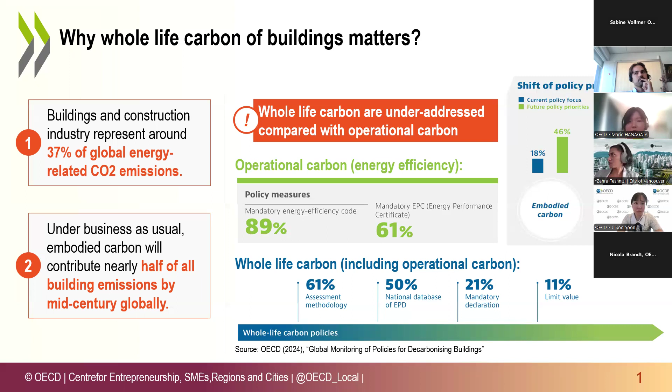Against this backdrop, we launched the OECD report on whole life carbon of buildings in February this year. This report is supported by a survey that we conducted across 11 countries and 7 cities, as listed here. While the level of progress varies, all of these countries and cities are leading in addressing a whole life cycle approach.

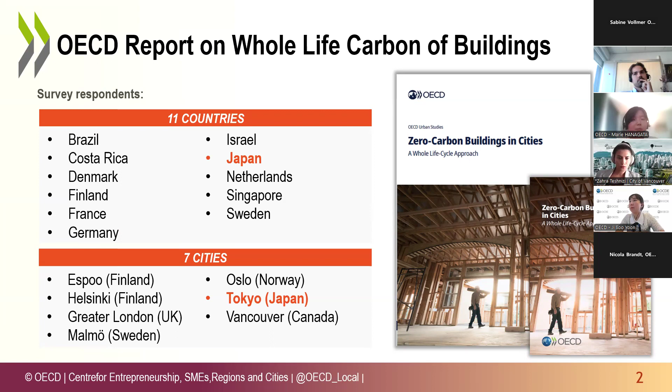Addressing all of these challenges requires time to collect data and conduct preliminary study, highlighting the need for a step-by-step approach and preparation before the actual implementation of regulatory measures.

This kind of step-by-step approach also appears in how they implement regulatory measures, but in different ways depending on the country or city. For example, in Sweden, the process began with mandatory reporting of upfront carbon only, but it applied to all building types. On the other hand, France took a different path by introducing limit values for whole life cycle right from the beginning, but only applies to some building types such as residential, office, and school buildings.

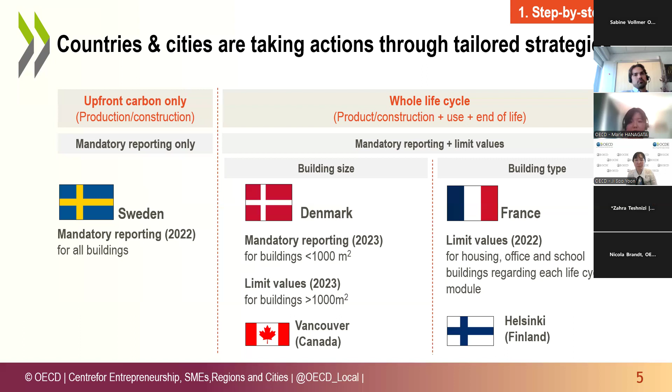Reducing workload can be tackled by developing digital whole life carbon assessment tools that integrate with building information models, BIM models. And the lack of EPD data can be addressed through policies such as incentives or regulatory measures.

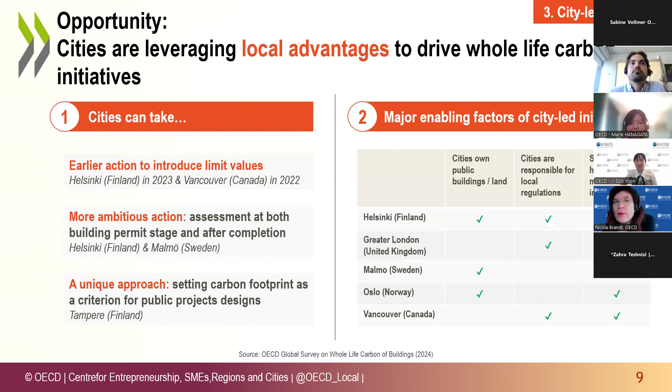That is environmental product declaration, which is basically a sort of certification that a manufacturer can obtain for their product that shows all the environmental impact data, including GHG emissions and so on. Because it's not easy to calculate embodied emissions, right? Yes, exactly, it's difficult to have the data.

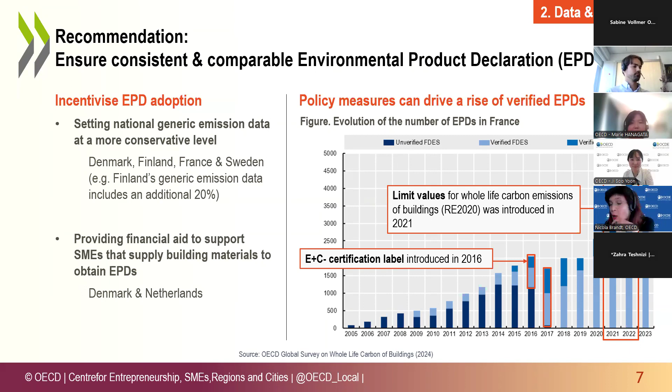And now, as Marie already announced or hinted, we have Hanna Wesslin, who's the climate director of the city of Helsinki. And we already heard that Helsinki has a lot of experience with this whole of life cycle approach. So we are curious to hear what you have to tell us, Hanna, over to you.

Thank you, Nicola, and thank you, Marie, also for the introduction. I'm happy to provide you a more in-depth story of the whole life carbon development in Helsinki, and maybe some nuances that might not be so obvious. So on to the next slide.

This is indeed the timeline that Marie already shared, but I wanted to let you know that the preparation did take quite a while. The discussion started already back in 2017 by developing the database on the national level. The city, however, was really eager to move on and acknowledged that probably the national level legislation will come at a point, but since we have so much in our power as a kind of monopoly in planning in the city, this was a golden opportunity for us to act.

But to set the limit value was indeed one of the challenges. What we did is go through over 60 buildings that the city had built, and did the calculations for those to be able to understand what the average is and where to set the standard.

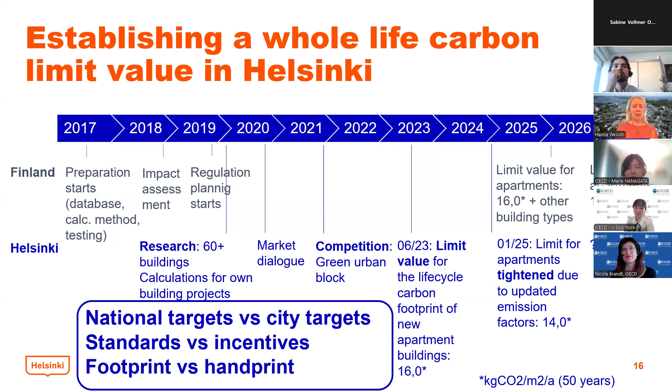This is really the kind of dilemma, or maybe not a dilemma, but an interesting discussion. We have a national value and a city value. All the bigger cities in Finland see that the national level target is extremely relaxed and doesn't really incentivize anything. Maybe it's for the learning process in the beginning, but since we have already practiced and learned for two years, the national level does seem unambitious.

What we have also understood with this experience so far is that the limit value does set a minimum. But we keep hearing from the sector that they could do much more. Companies are actually having their own limit values that are lower than the city value, and they would like to be rewarded for their good work. At the moment we only have the limit and it doesn't give you any incentives. So that's one question.

Thirdly, with the development of construction materials and technologies, and the need to make sure that we actually take carbon out of the atmosphere, we also now think a lot about handprint, because this is really about footprint. But what about any carbon that is stored in the buildings, like carbon negative concrete, that we have already experimented with? The limit value at the moment doesn't really take that into account, and we have to find other ways to incentivize that too.

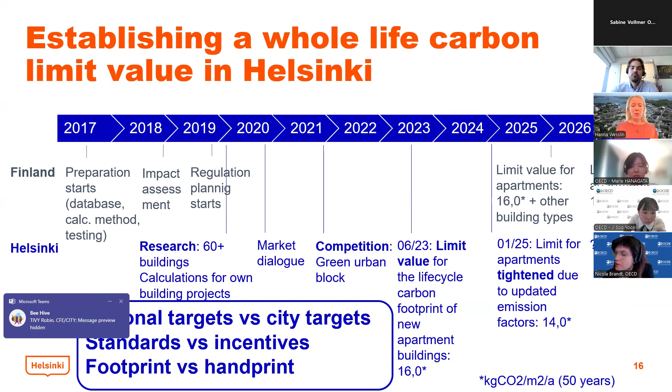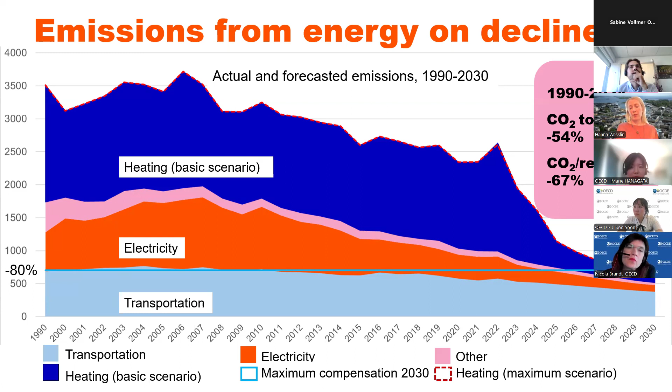But exactly as Marie was saying, when we look at the building sector, the material sector will be so much more important in the future than energy use. It's really imperative that we start using more low carbon products - reuse of components, reuse of materials, recycled products, carbon negative products, low carbon products.

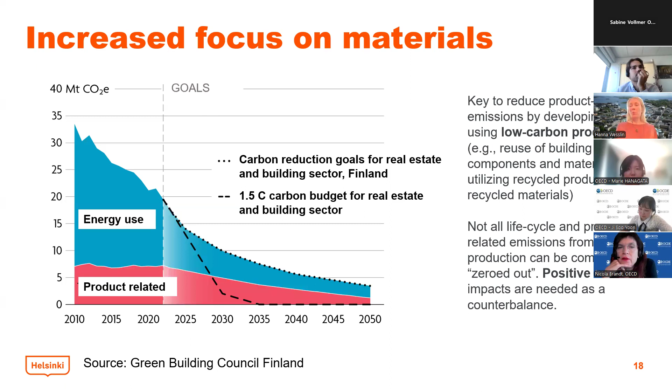The Green Building Council of Finland, which produced this analysis, also found that the current national level, the 2026 national limit value, reduces the sector's emissions by only 0.5%. So it is a reduction, but it's a very small number, and we feel that as a city we want to be more ambitious than that. And that's it for me.

Thank you very much, Hanna. I have a hundred questions, but in particular how you did that with the district heating. But of course, we're looking at the full life cycle.

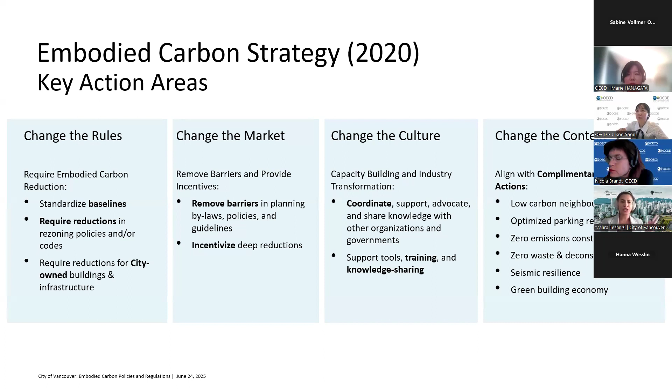Looking at the regulatory part - as Marie mentioned, back in 2020 when the Climate Emergency Action Plan was released, one of the biggest gaps we had was having a framework to standardize embodied carbon reporting. There are lots of standards out there, like the EN standard, the ISO standard, and one released around 2022 in Canada. However, the challenge was that the scope was still quite flexible to the judgment of the person doing the assessment. So our team worked with industry, with a lot of feedback from leading industry members from across North America and even globally, to develop embodied carbon guidelines for the City of Vancouver.

One of the huge leaps we were successful in implementing, which shows how cities and national governments can work together, is that our national government went ahead and adopted this series of guidelines we published as the Canadian National Whole Building Life Cycle Assessment Practitioner's Guide. Vancouver then went ahead just this year and updated our reference in code to this national guide, with an addendum for the City of Vancouver allowing some specific things not included in the national one, to allow for broader adoption but also some innovation.

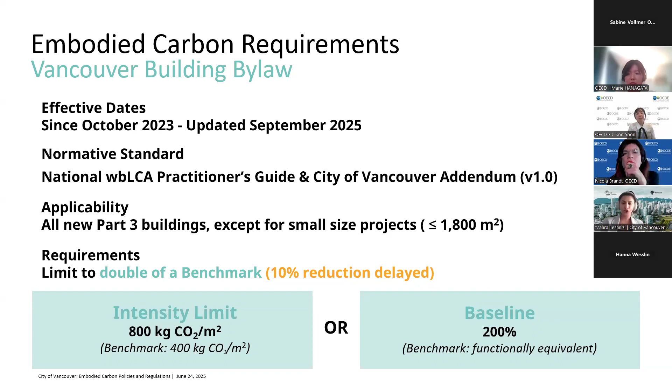And we started with a preliminary limit, which is double a benchmark. What was huge in what we achieved through those guidelines was that we developed a very specific way to define a baseline, given that we didn't have rigorous absolute embodied carbon intensity targets. The guidelines essentially allow 2 pathways: one is an intensity pathway, which we've set at a value of 400, using submissions received from rezoning from 2017 to 2024, and then a baseline path, which is a functionally equivalent baseline building.

So basically, as I mentioned, we provided 2 pathways and picked one absolute benchmark number, which is 400. We took it from the rezoning submissions we received, and essentially any reduction comes from that.

So what we had proposed was from 2025 to require our first reduction of 10% from the benchmark, which is delayed. We haven't taken this to council, even though it's approved in principle by council back in 2022. We haven't taken it to council for final implementation, and that comes with a lot of challenges industry is facing, and I don't think that's limited to Vancouver. We can get into that later.

The reason we picked that 10% and also that 400 benchmark is that if you look at our low-rise wood buildings on the left, you'll see that the majority of projects submitted today are meeting that absolute limit, so they don't really need to do much other than assessing and reporting. But if you look at the high-rise concrete, the third from the left, the majority are above that absolute limit.

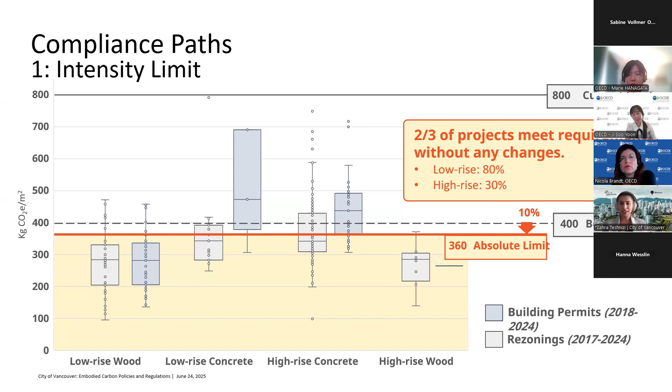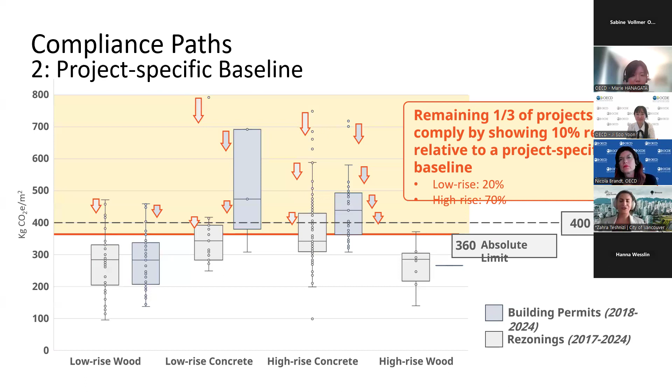We understand that these are more sophisticated projects, and we expect those to actually go through the baseline path, showing relative reduction from the proposed design rather than that absolute number. So what we understood is that this 10% initial reduction is not as challenging. Despite that, we are still delaying it for a proper time to go ahead with it.

So let's talk a little bit about enabling by removing barriers and providing incentives. First, we understand that our neighborhood planning plays a key role in allowing low embodied carbon buildings. Through our neighborhood and village plannings within the city, one example is the Broadway plan, which allows mid-density, say 4 to 12 story buildings, which now through our code is allowed to be built with mass timber, up to 6-story wood frame, which also allows for wood frame buildings.

So that is essentially allowing lower carbon structure. And then also we are allowing for simpler forms, and we've removed the minimum parkade requirements. The Broadway plan did it before the city did it citywide. So again, all of these enable reduction.

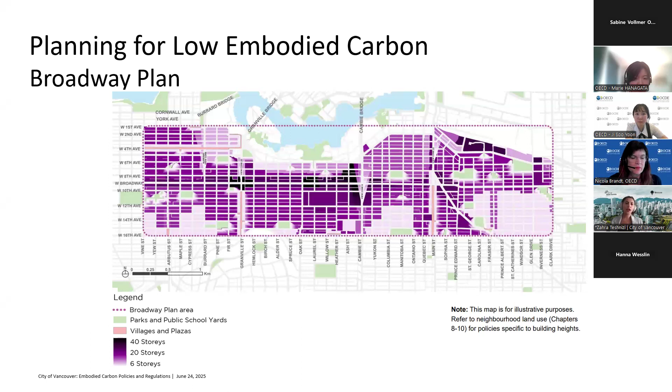We also have provided incentives for mass timber buildings specifically. Our code was updated just a couple of years ago to allow building mass timber up to 18 stories, encapsulated mass timber. And we also provided additional incentives at rezoning, so projects that go through rezoning to change their building zone are able to request an additional 2 to 3 stories depending on their height.

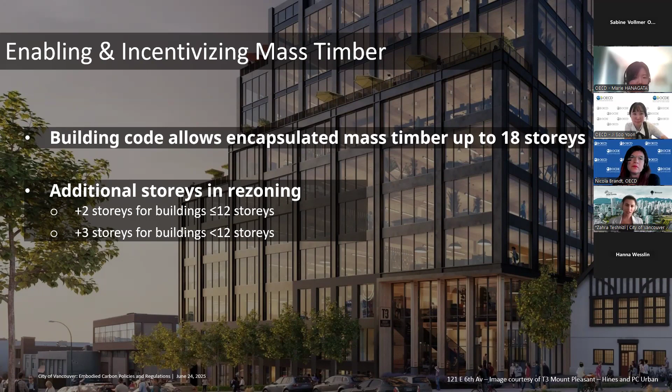We also provided incentives specifically for low-rise homes through a program we previously initiated for operational carbon, but which was expanded with a new stream for embodied carbon, providing financial incentive for 30% plus reduction in exchange for data. We've actually collected very valuable data from about 25 projects in this program, which will help inform our low-rise code approach later on.

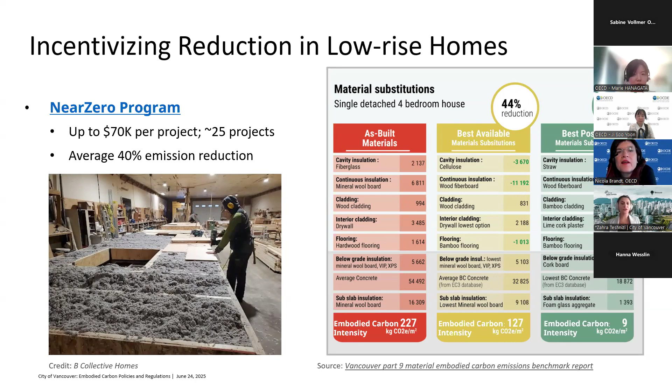So I mentioned that we have an addendum to our national guide, which allows us to encourage and pilot some more innovative approaches. One we're quite proud of, though we haven't seen the impact yet, is that as we move toward reduction and provide more incentives, we are allowing accounting for biogenic carbon—not for all biomaterials, specifically excluding wood because of challenges ensuring the biogenic carbon is accounted correctly, but for other biomaterials that use byproducts or otherwise waste streams or materials with a short growth cycle.

So this essentially allows us to encourage more use of these materials in practice.

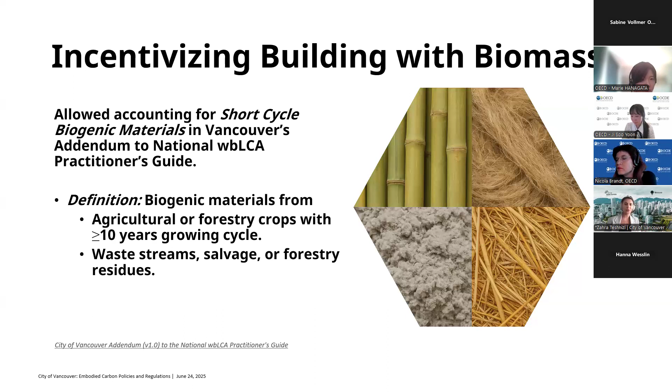Next slide. We also have, through that addendum, provided a set of optional credits for projects that want to go above and beyond and report on elements we don't have sufficient data on today. For example, in the North American databases, we are missing mechanical, electrical, and plumbing emissions. So we give credit, even if it results in a lower reduction requirement, if projects choose to report these, because simply getting that data is valuable.

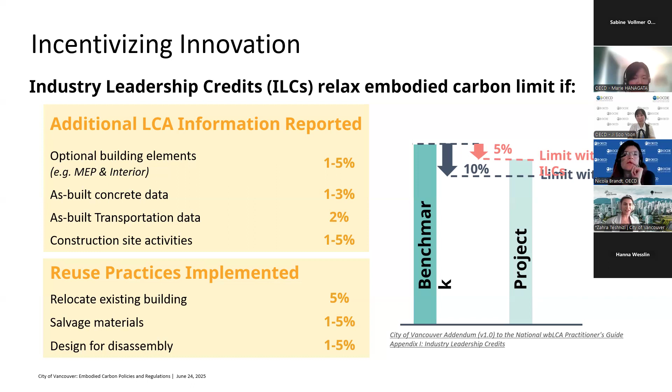We are also providing a similar credit for reuse and circularity practices, which currently cannot be accounted for through the whole building life cycle assessment methodology. For example, salvaging from the site but not reusing it on the same site, or designing for disassembly.

Next slide. This is a schematic view of the work we've done. Right now we are working mostly on ensuring industry is familiar, case studies are coming out, incentives are being developed, and barriers are removed, to hopefully take our first reduction step later this year or early next year, pending work with the industry and ensuring they're ready for that step.

However, in the background, we are doing a lot of foundational work, like the databases we talked about, while waiting to take this to council, so that when the time is ready, we have the tools and resources we need. I believe that was my last slide. So thanks.

And thank you, Zahra. Before I give the floor to our next speaker, I have one question to better understand what you just told us. My question is about low-rise buildings. What is that, Zahra?

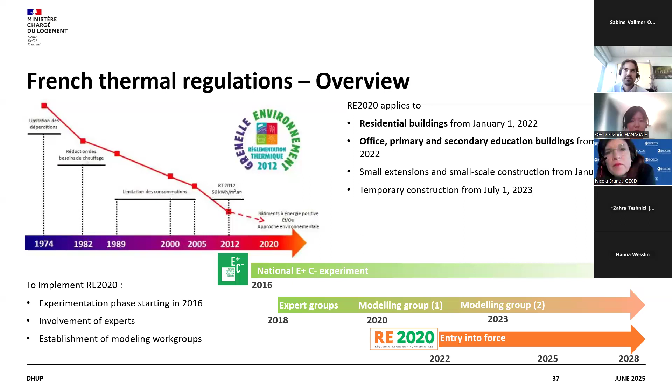So since 2022, this new regulation gradually replaced the previous regulation, which was RT 2012. It now applies for residential, office, and primary and secondary education buildings. Next slide, please. So our next step now is to roll out RE 2020 to new buildings not yet subjected to this regulation, so other tertiary and industrial buildings.

So now, here you have the base of the methodology we use. We select a panel of buildings, we do environmental modeling and energy modeling of these buildings to set the limit values. Then we consult the stakeholders to see if there's any problem with that, and we change the values a bit, and then it goes into effect. Here you have the 10 types of buildings we are studying now. Right now we are near the publication of the decree which will implement this regulation for this type of building. We are actually currently doing the mandatory consultations.

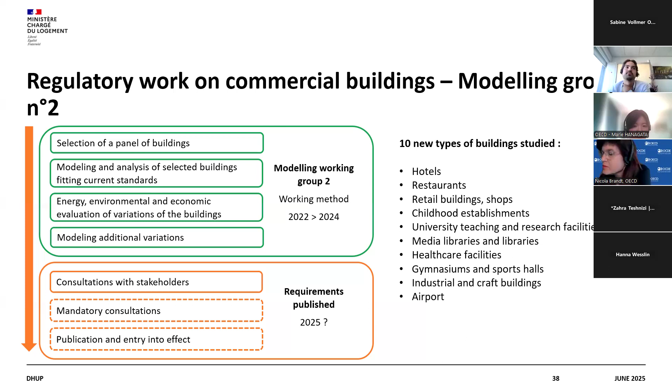So next slide, please. To come back to the objectives of the regulation RE 2020, it tackles both energy sobriety and energy decarbonation, and also the reduction of the carbon footprint of buildings. The third pillar of RE 2020 is to ensure the comfort of these buildings during heat waves. So there are three pillars to RE 2020.

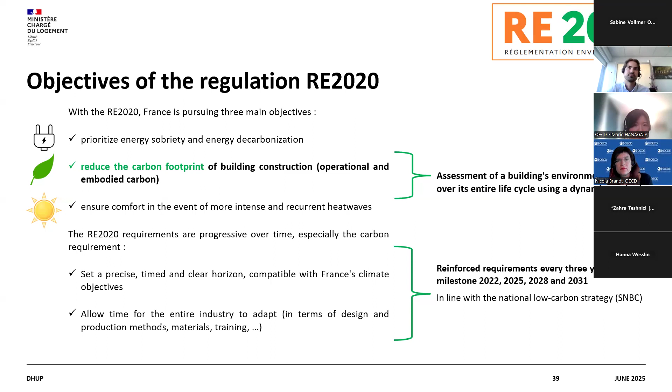When it comes to carbon footprint, there is an assessment of the carbon footprint through LCA, life cycle analysis, using a different method that is often used - it's a dynamic method, a simplified dynamic method. I will come back to it later. These requirements applied to the carbon part of RE 2020 are reinforced every 3 years through different milestones. The first one is easy to get, so 2022 was easy to achieve. Between 2025, 2028, and 2031, it is increased a bit every 3 years, so in 2031 it will be between 30 and 40% tighter than in 2022.

Okay, next slide please. As I said, RE 2020 is based on main indicators that are associated with a limit value. For the carbon part, we have IC construction and IC energy. So IC construction is about embodied carbon, and IC energy is about energy consumption.

When it comes to the perimeter of buildings, so of building parts, the assessment is done on a reference study period of 50 years, and it takes into account all the building components, including systems, ventilation, energy, communication networks, etc. So everything is accounted in the LCA. The construction site impact is also calculated separately, but is part of the final indicator, IC construction.

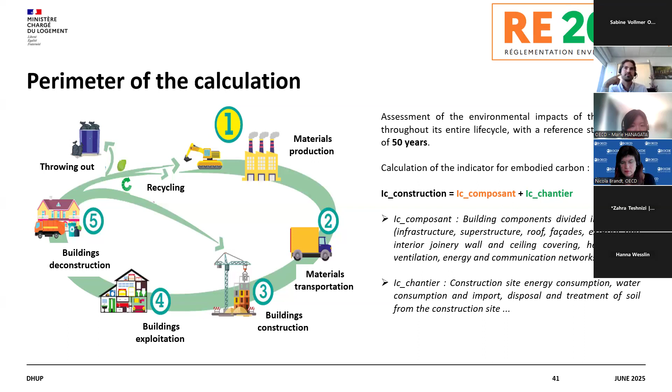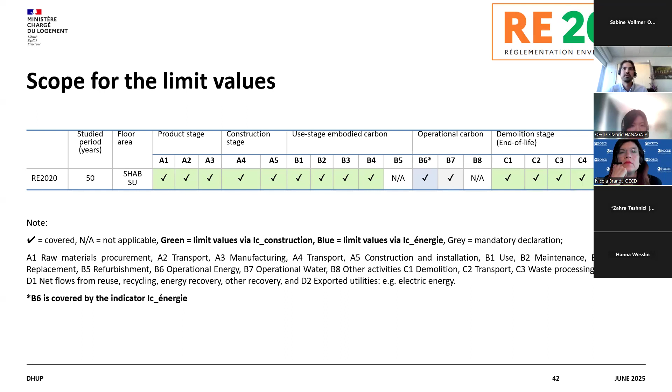Now a little explanation of how the limit is set. You have a flat value, a mean value, the IC construction max moyen - the mean value that is then modulated according to different specificities of the project. This allows everybody to have the same level of levers to put into place in their project, so everybody is impacted by this regulation the same amount. It modulates for different characteristics of the project - I won't go into details here.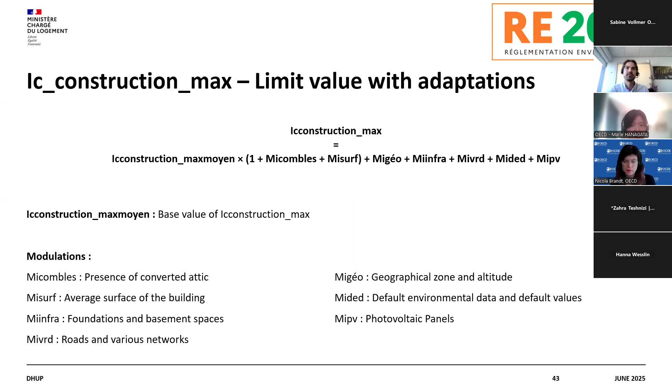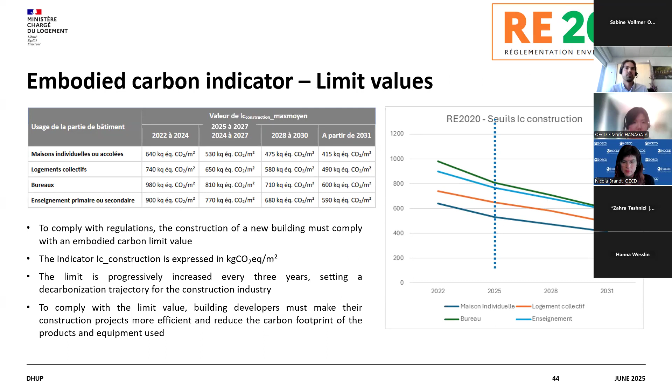Here you have the limit values for IC construction, for embodied carbon, for each type of building and each year.

We focus more on the specificity of RE 2020, which is its dynamic approach, which is new from the beginning. First, it was a static approach as broadly used in European standards, like 15978, for example. But we decided to adjust from these standards and differ a bit to take into account the stored carbon. We believe it's an approach more in phase with what's at stake, which is the urgency of climate change.

This approach gives more weight to emissions that occur at the beginning of the life cycle than emissions later in the life cycle. So it allows, for example, bio-based materials to perform better in these calculations.

Here we have an example for a timber beam, a specific product. At the left side of the table you have the life cycle values for the product in the EPD, the declaration. Then you have the modulated version on the right side, and you see it performs better with the dynamic approach. On the graph on the right, you have the dynamic factor applied depending on the year of the emission in the calculations. For example, the emissions from the demolition of the building are accounted for at only 58% of their original value.

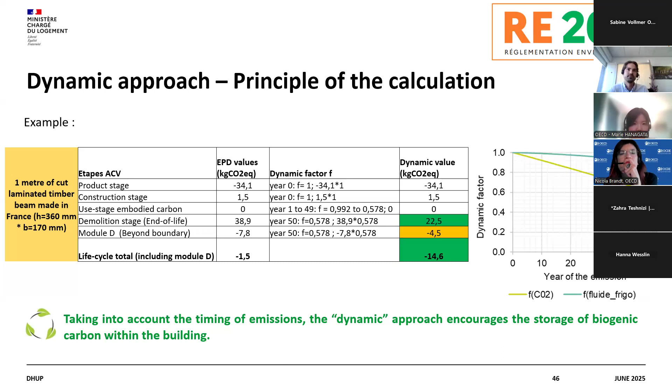Now I'll talk a little bit about the tools in place for stakeholders to perform the LCA. To carry out the LCA for their projects, project owners have access to different types of tools. First there is the database, called INIES, that contains all the available and up-to-date data on products, equipment, and construction materials - specific data produced by manufacturers.

There are also default values produced by the ministry, and service data - for example, to calculate IC energy, you have to have the conversion of 1 kilowatt hour into CO2. So this is the first tool that is available.

These environmental data, the specific ones produced by manufacturers, must be verified by an independent third party, the audit programs. You have FDES, the INIES program, for all products that are not systems, and for systems you have PEP EcoPassport. Both programs verify the data that is produced, in collaboration with our ministry to meet certain standards, and then the data can be used for the regulation.

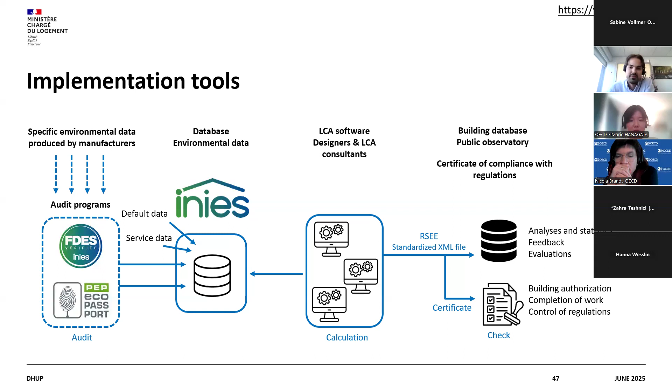So first, there is a first version that is collected at the building permits, and then the latest one is collected at the completion of works. And then after that, it's added to a national observatory to do analysis. Maybe later we will use this data to control if the regulation is well applied.

So as I said, it's collected on an observatory. This observatory has three main objectives. First is transparent monitoring of public policy by making it possible to track changes in construction performance and to identify trends in terms of technical solutions employed. So it's very useful for that.

Then it provides input for discussions on changes to public policies relating to the building industry by creating a common technical reference framework for the sector and producing analysis that can be widely distributed. And also to support the development of skills throughout the sector by making it possible to identify relevant solutions and share experience and ideas.

So it's very fruitful, and soon we will release an open data database of all the projects that are actually working on it. So it will be easier to do analysis for all the stakeholders.

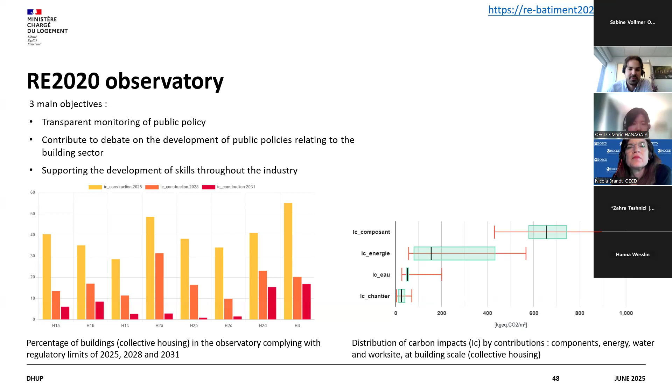There's a spontaneous question from Sarah, and perhaps it's a good moment to bring it up. She's asking whether FDES and the PEP Eco Passport, the ones that you just presented, are run by independent parties or are they run by you, the government?

No, they are run by the industrial manufacturers. They have their hands on it, but they have a convention with us. So you basically meet and agree on some standards.

Yeah, and then you talked about a Web LCA database, and she was wondering, is that accessible to everybody or just to you, the government? No, the observatory is accessible for everyone.

And soon the open data database of all the projects will also be open data. That sounds good. Bravo. Very soon, in a few weeks or months, I don't know. Well, that's great - more food for learning from each other.

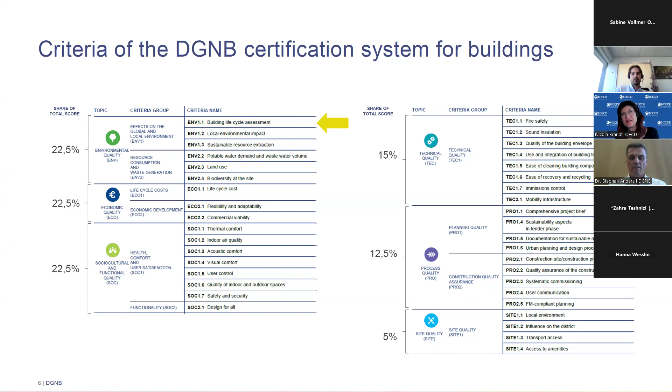On the next slide, one slide about German sustainability and especially climate protection goals. Maybe you know, in Europe, we have the goal to be carbon neutral by 2050. In Germany, we have a slightly more ambitious goal to be carbon neutral by 2045.

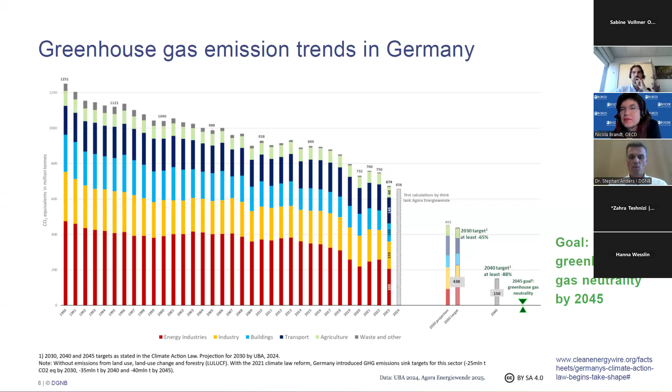There is the case. In Germany, we have a bit of a different approach—it's more about funding. On the next slides, you can see subsidies or financial support for climate-friendly construction.

If you plan a new building focused on CO2 emissions, there are different limit values I will show you later. On energy, you can get for one residential unit 100,000 euros as a grant, so you don't have to pay as much to the bank. It's not that you get 100,000 euros for only one unit.

For non-residential buildings there's another number. If you do CO2-friendly construction and also focus on the other criteria I showed before, there's another funding scheme for climate-friendly construction—then you can get up to 150,000. The idea is to give money to developers who want to build more sustainably. It started two years ago, so it's still rising.

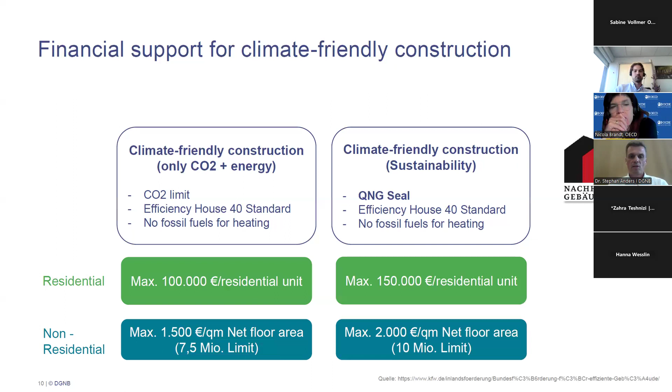There aren't that many such buildings yet, but it's getting more and more common. For official buildings, it's mandatory if they are bigger or cost more than 5 million euros—basically all larger official buildings—to have the sustainability seal for the building.

On the next slides you can see how it works. Our government defines minimum criteria, the German Anforderungen des DGNB QNG Plus. This means there are minimum criteria for CO2 emissions, but also for barrier-free design and others I will show later. Because it's only minimum criteria, it has to be combined with an accepted certificate in Germany. We certify 80% of all buildings in Germany, but there are also some smaller German rating schemes that can also prove fulfillment of these requirements.

So as a developer, if you want the maximum financial support, you have to certify your building with DGNB. Part of this certification process is also to show that the minimum requirements are fulfilled. On the next slide you see the minimum criteria the German government has defined.

One of them is greenhouse gas and primary energy—I'll show more detail later. We also focus on sustainable material extraction, where the materials come from. If you use wood, it should come from sustainable sources. We also focus on pollutants in building materials, VOCs and other chemicals that may not be good for your health, and on accessibility or barrier-free design.

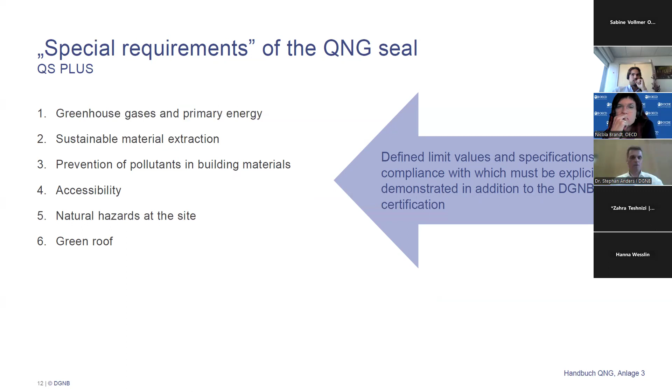You also have to analyze natural hazards on the site, like too much water or too much rain, and how you deal with those risks. You also have to build a green roof if it's possible. So these are the minimum criteria.

In the next slide, you can see the values for greenhouse gas emissions. You have to do a calculation for the whole life cycle—CO2 emissions for construction, but also for operation. There's a complex definition of how to do that. In the end, you have to be lower than 24 kilograms per square meter per year, for residential buildings I think. There's also a premium variant requiring 20 kilograms per square meter, but for now it's not mandatory for the funding. Maybe in the future they'll decide something different.

Next to the CO2 emissions, you also have to fulfill a minimum energy performance, at the end from 96 kilowatt hours per square meter for the building. So yeah, these are the values.

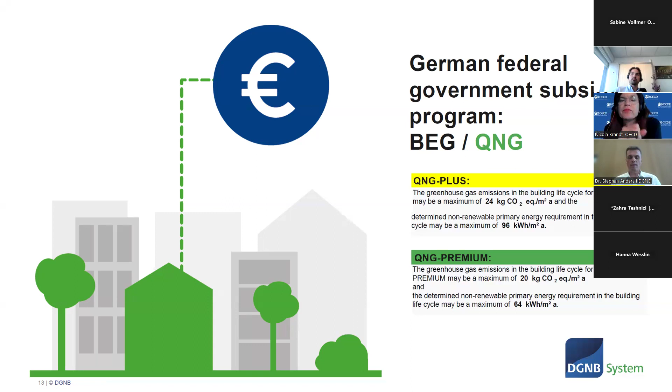It's always important, if you only look at the values, to also understand the definition behind them. If you look at our partners in Denmark, for example, the value there is about 11 kilograms, but this doesn't include the operational CO2 emissions, for example. This may also be important if we come to discussion later. Okay, thanks—sorry, this was two more slides.

So just to understand the context, also in Europe there's the so-called EU taxonomy. That means there are criteria for every kind of investment, not only buildings but also agriculture, infrastructure, and so on. You have to fulfill some minimum criteria, one of which is climate change mitigation, and the same for CO2 emissions calculation.

At the moment, we offer investors the possibility, if they certify their building with DGNB, to check if the EU taxonomy criteria are fulfilled, because more and more banks and investors are asking whether the building is EU taxonomy conform next to the DGNB certification. So here too, CO2 emissions are getting more and more in focus.

On the next slide, you see our offer to make a third-party review of the EU taxonomy criteria. And on the next slide, another topic, still voluntary: the EU reporting tool Levels. Here too, the EU Parliament defined criteria for sustainable buildings, so this goes even further than just focusing on CO2 emissions.

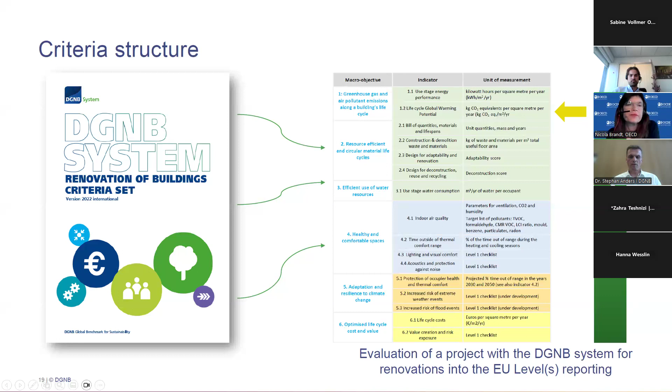Maybe we can go one slide further - things like Levels and taxonomy in our rating scheme, so that at the end the investor knows that if he certifies a building with DGNB, he also fulfills other regulations. It should be maybe on the last slide, you can see it there.

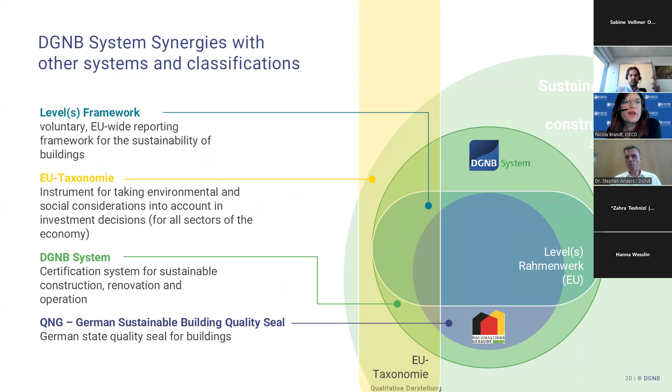So you can see here, once more: sustainability in the construction sector is big, although we don't include everything in our system. What we do include here is Levels, the German QNG, and also part of the EU taxonomy. Okay, thank you. I hope we gave you an overview of how we deal with this topic in Germany.

Great, Stephan, thank you. I just have one question now, because you were talking about EU taxonomy and I was trying to understand - the DGNB, the Sustainable Building Council that you represent, are you the standard setter for Germany in that area? Is that right? Do you set national standards, or how does it work in Germany? Because it sounded a lot like what Vincent described - in France it's pretty much central, right? What's being done? How does it work in Germany?

Yeah, we are more the standard setter for the market. So investors and developers believe in our certification standard, but it's totally free, and it's a big discussion process with all our members about how the standard looks. We don't work together with the German government directly, though sometimes they ask us a question regarding sustainable building and how to do that, but we are not directly involved.

And on the EU level, sometimes we are also invited to give feedback. For example, when they published the first version of the EU taxonomy draft, we asked our members if they were interested in testing this criteria on first projects, and we did this. The feedback we learned there we gave back to the Commission, but we are not directly involved in the process. If we were, we would probably make some criteria a bit different and more aligned to the DGNB system - that's not the case, unfortunately, at the moment.